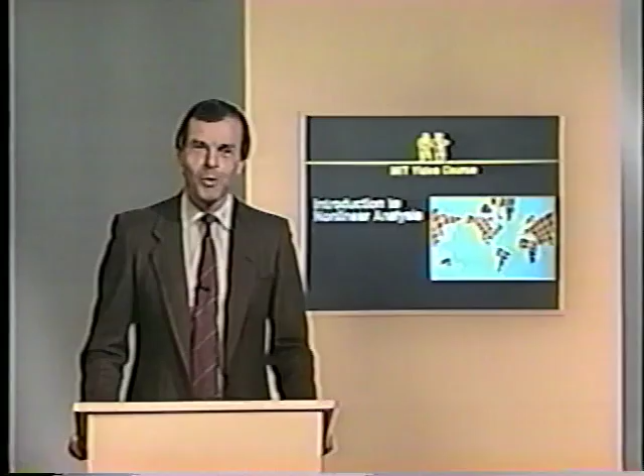Let me now share with you briefly some thoughts that I had while designing this course. The field of nonlinear finite element analysis is a very large field, and in fact 4 large fields come to mind as feeding into nonlinear finite element methods: continuum mechanics, finite element discretizations, numerical algorithms, software considerations. Because the field of nonlinear finite element analysis is such a large field, I had to select certain topics as the topics of this finite series of lectures.

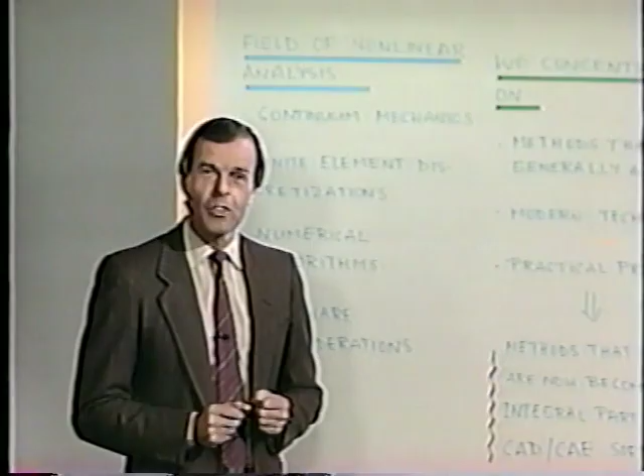I believe that the lectures provide a good introduction and foundation to nonlinear finite element analysis. Of course, the lectures cannot answer all the questions that you might have regarding nonlinear finite element analysis. I believe, though, that they will be answering some of the questions and hopefully stimulate discussions that you might have while watching these lectures with your colleagues.

We at MIT continue to work in nonlinear finite element analysis, and we also offer from time to time short courses. It would be very nice to meet you at one of these short courses and to discuss any questions that you might have regarding these lectures once you have seen them, and regarding your work on nonlinear finite element analysis in general. Let me now return to what I like to talk about in this course.

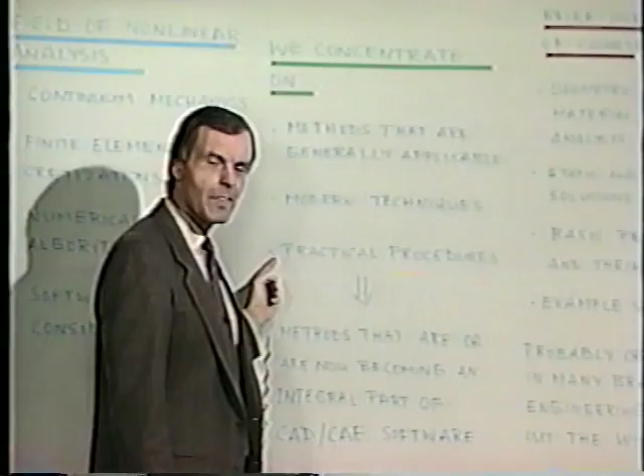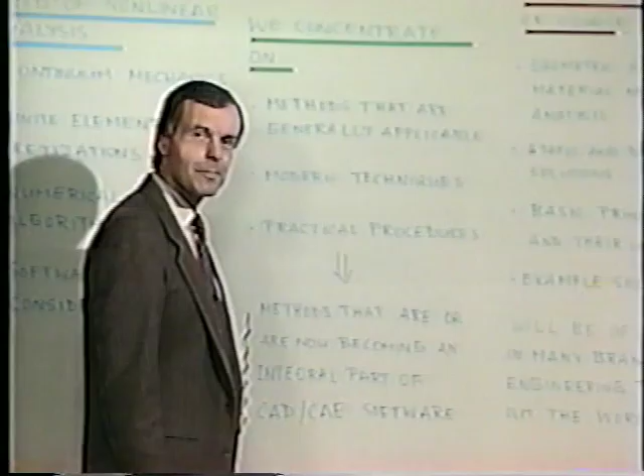In this course, we want to concentrate on methods that are generally applicable, modern techniques, and practical procedures. I believe it is important that we discuss in this course practical and effective procedures, in particular methods that are or are now becoming an integral part of computer-aided design, computer-aided engineering software. In this course, I would like to discuss with you geometric and material nonlinear analysis, static and dynamic solutions, basic principles and their use, and share with you example solutions.

I believe that the course will be of interest in many branches of engineering throughout the world, and in this spirit we have designed a logo for this course. The logo is shown here. It shows the whole world as an assemblage of finite elements. If you're watching me from Chicago, you're watching me from about here. If you're watching from Munich, you're watching about there. And if you are in Tokyo, you're watching me from about there.

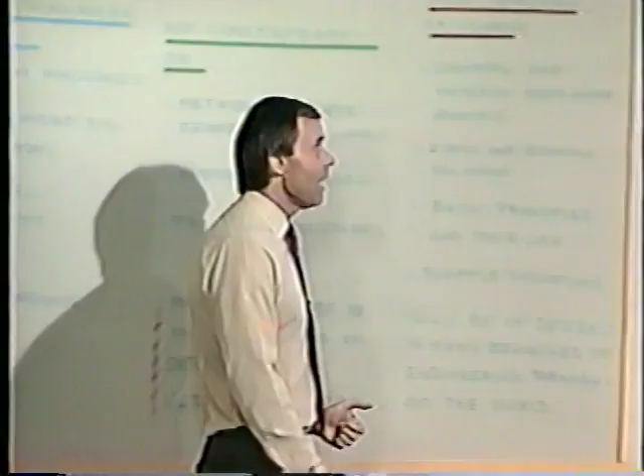Welcome to this course. I'd like to now start with the first lecture, which has the title Introduction to Nonlinear Analysis. And let me take off my jacket because we have a lot of work ahead, and summarize to you what I would like to present to you in this first lecture.

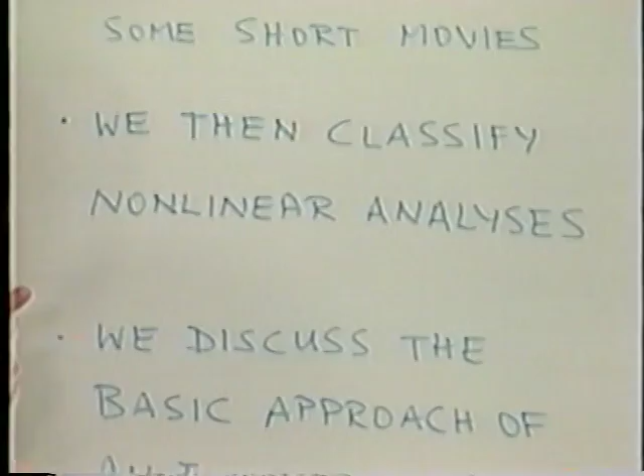We discuss first some introductory view graphs and show some short movies. We then will classify nonlinear analyses. We then discuss the basic approach of an incremental solution, and we share some example solutions. Let me walk over to my view graphs, which I've prepared for this lecture, so that we can start with the discussion of this material.

Finite element nonlinear analysis in engineering mechanics can be an art, but it can also be a frustration. For those of you who have been doing some nonlinear analysis already, I think you will value that it can be an art and it can be a frustration, because it can be a very difficult matter, but it always provides a great challenge. And that, of course, is the exciting part of working in nonlinear finite element analysis.

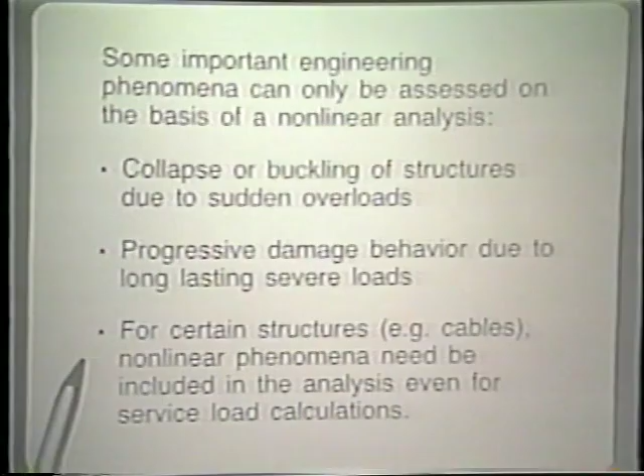Some important engineering phenomena can only be assessed using nonlinear analysis techniques. For example, the collapse or buckling of structures, due to sudden overloads. I'm thinking here typically of shell structures, say. The progressive damage behavior due to long-lasting severe loads, such as, for example, high-temperature loads in nuclear reactor components. And for certain structures, such as cables and transmission towers, nonlinear phenomena need be included in the analysis even for service load calculations.

The need for nonlinear analysis has certainly increased in recent years due to the need for the use of optimized structures, the use of new materials that are being introduced or have been introduced over recent years, and the addressing of safety-related issues of structures. There's more rigorous attention being given to such safety-related issues now, and certainly the corresponding benefits can be most important.

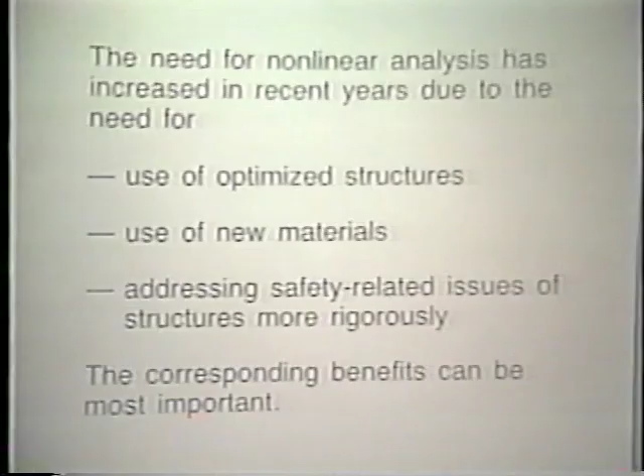Problems that are addressed by nonlinear finite element analysis can be found in many branches of engineering. I've listed here some such branches: nuclear engineering, earthquake engineering, the automobile industries, defense industries, aeronautical engineering, mining industries, offshore engineering, and so on.

I'd like to now show you some movies that we have assembled regarding some finite element analyses in certain fields. Let us start with a movie related to the defense industries, then go on to a movie related to some work in the automobile industries, then look at a movie related to some work in earthquake engineering, and finally an interesting movie regarding a structural engineering problem.

So let me now introduce you to the first movie, which is a movie in which a tank is modeled using a geometric modeler first and then setting up a finite element mesh.

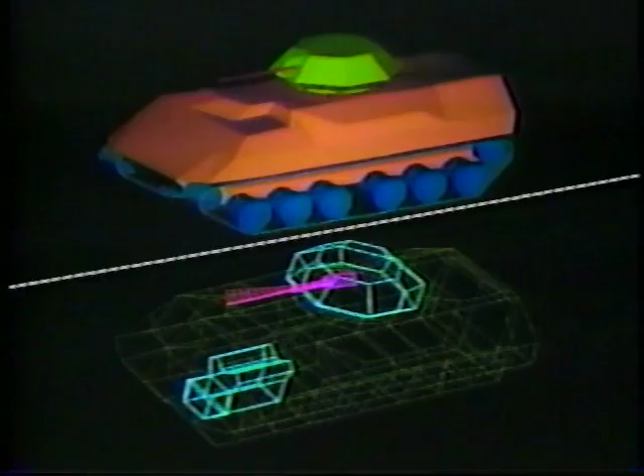Here we see a tank in a maneuver. You surely have seen such structure before. Here you see in the top part of the picture the geometric model of a tank, and in the bottom part of the picture a finite element discretization. The top model was generated using a geometric modeler, and the bottom model was obtained using a finite element mesh generator. These models were constructed by Structural Dynamics Research Corporation.

The second movie relates to a problem that has obtained much attention in the automobile industry, namely what happens when a motor car crashes against another motor car. Tests have been performed of motor cars crashing against rigid walls. Test results have been assembled, and finite element methods may well be used in the analysis of such types of problems.

Here we see a test performed by the Ford Motor Car Company of a car crashing against a rigid wall, and here a close-up of what happens to the passengers not wearing seat belts. And another such test. Here now in more detail what happens to the front part of the car.

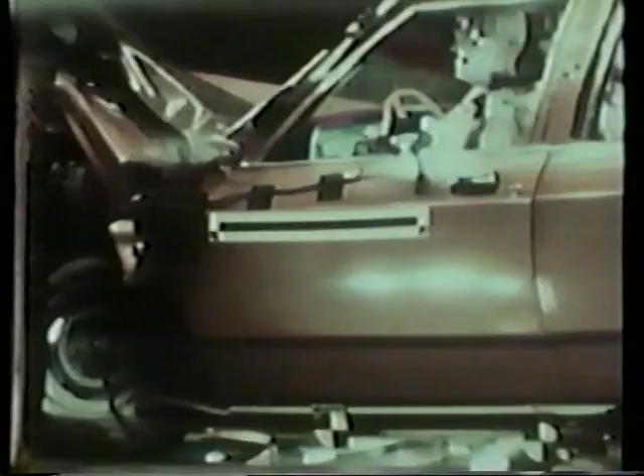There has since some time been much interest in modeling these phenomena on the computer, and finite element methods can be applied and are very valuable here.

The third movie relates to the use of finite element methods in earthquake engineering. Here we look at the finite element model of a tank and the dynamic motions of that model. We are surely all aware that earthquake motions can cause severe structural vibrations and possibly collapse of structures.

Here we see a transformer and the tank to be modeled on it, and here a close-up view of the tank. The finite element model of the tank was constructed by ASEA, a Swedish company, and here we see some vibratory motions of the model.

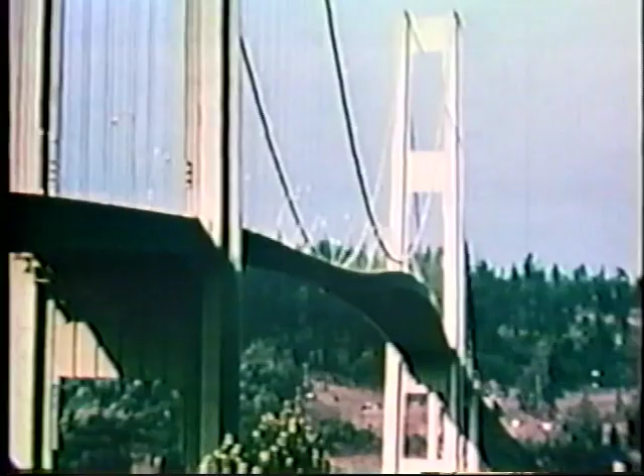The fourth movie shows the dynamic response and collapse of the Tacoma Narrows Bridge in 1940. The Tacoma Narrows Bridge collapsed on November 7, 1940, about four months after its opening, in winds of 40 to 45 miles per hour.

Here you see the dynamic motions of the bridge prior to its collapse, a side view, and now a view along its center line. Notice the high torsional vibrations of the bridge. The bridge went through large dynamic motions for hours until its collapse. We only show a very small segment of that time. And here you see how the bridge collapsed.

Of course, these movies only indicate to some extent where finite element methods might be applied in engineering practice, but I thought you might enjoy seeing the movies. Let me now continue with the material that I have documented on the view graphs.

For an effective nonlinear analysis, a good physical and theoretical understanding is most important. You want to have some good physical insight in the problem, set up a mathematical formulation, a finite element model, solve that model, and that will enrich your physical insight. It is this interaction and mutual enrichment between the physical insight and mathematical formulation that can be most valuable.

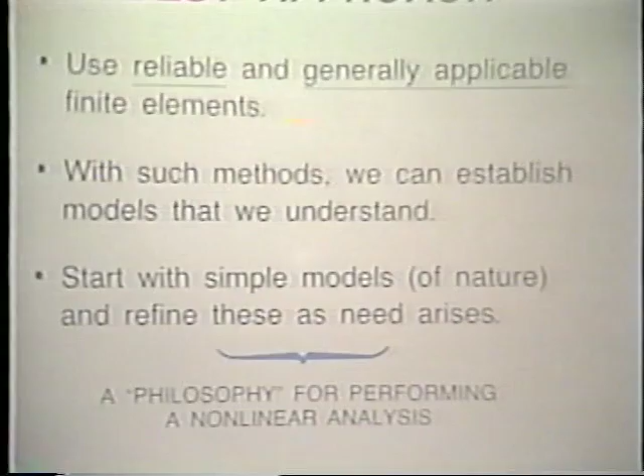The best approach for a nonlinear finite element analysis is to use reliable and generally applicable finite elements. With such methods, we can establish models that we can understand, that we have confidence in. We start with simple models of nature and refine these as need arises. In fact, I like to think of an engineer as developing a first model on the back of an envelope, using simple equations, and these equations will give some insight into the structural response.

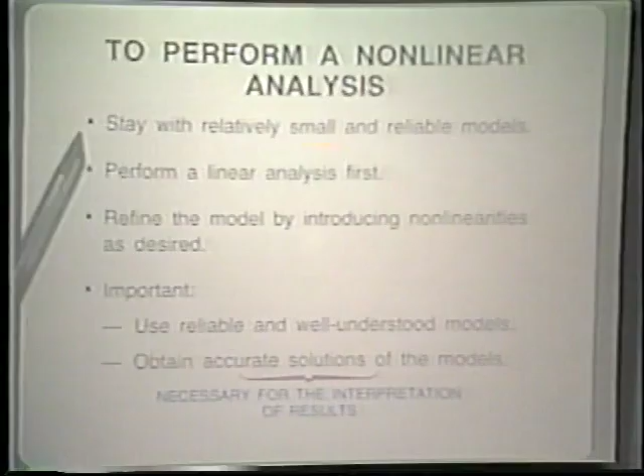If necessary, a first finite element model is set up, and this finite element model is then refined as need arises. To perform a nonlinear analysis, we want to stay with simple, relatively small and reliable models.

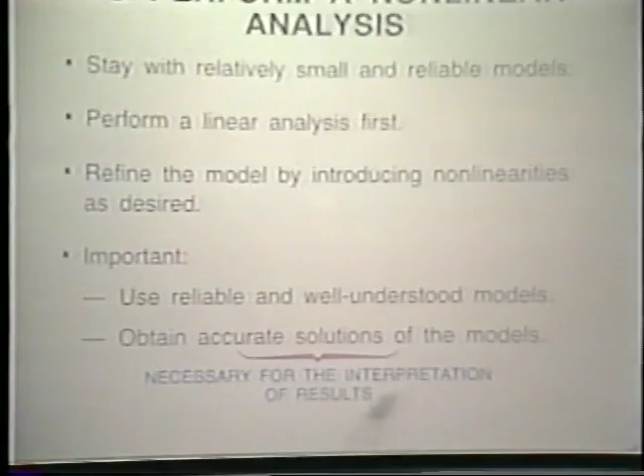We always want to perform a linear analysis first. I will show examples in this course related to this. It is very important in my view to first do a linear analysis and then only go on to a nonlinear analysis. We want to refine the model by introducing nonlinearities as desired, using reliable and well understood models, and obtain accurate solutions. This is very important for proper interpretation of the results.

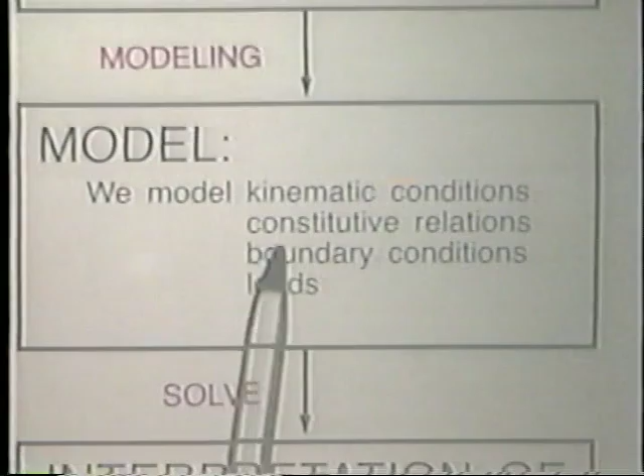Here we show schematically the finite element modeling process. We have a problem in nature. We model that problem, the kinematic conditions, the constitutive relations, the boundary conditions, the loads, and so on, using finite elements. We solve the model and interpret the results. This model can only approximate the actual problem in nature, and on interpretation of the results, we may find that we should refine our model. We set up a new model, solve again, and we may cycle a number of times through this process.

Traditionally, test results have been sought for very complex problems. Laboratory test results have been sought, and this may still be necessary now. However, the finite element modeling process will certainly complement these laboratory test results.

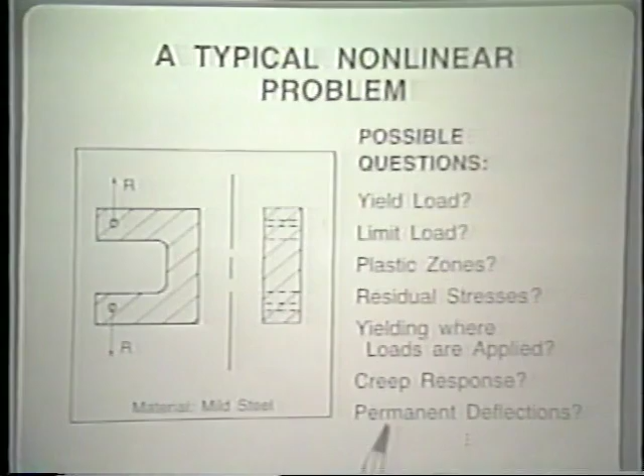What are the plastic zones? What are the residual stresses when the load is removed? Is there yielding where the loads are applied, right around here? What is the creep response of the bracket when subjected to high temperature conditions and these loads? And what are the permanent deflections of the bracket, etc.

There are many more questions that could be asked, and certainly these questions can only be answered by a nonlinear analysis. Possible analyses that we might consider are the following.

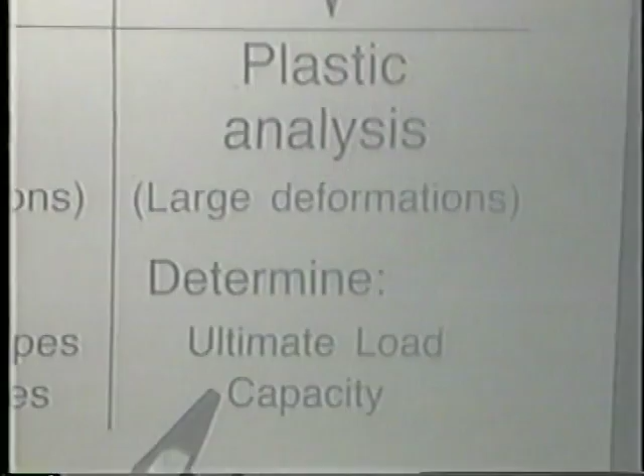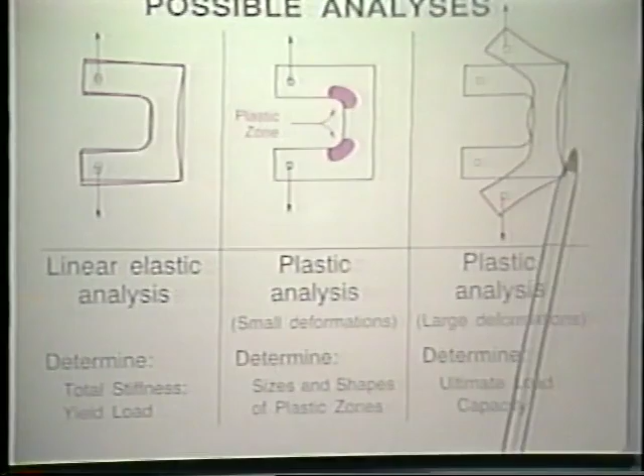Then we might want to go on to a large deformation plastic analysis. This analysis would determine the ultimate load capacity of the bracket, and notice the displacements are now large. They are actually large. Here we had small displacement assumptions; here we have included the large deformation effects, as also shown on the view graph.

For analysis, it is very good to actually classify all the types of analysis that one might want to perform. The first category of nonlinear analysis is what we call materially-nonlinear-only analysis, MNO analysis. In this analysis, we assume that the displacements are infinitesimal, the strains are infinitesimal — both of these quantities are very, very small — and the stress-strain relationship is nonlinear. So all nonlinearities lie really in the stress-strain relationship.

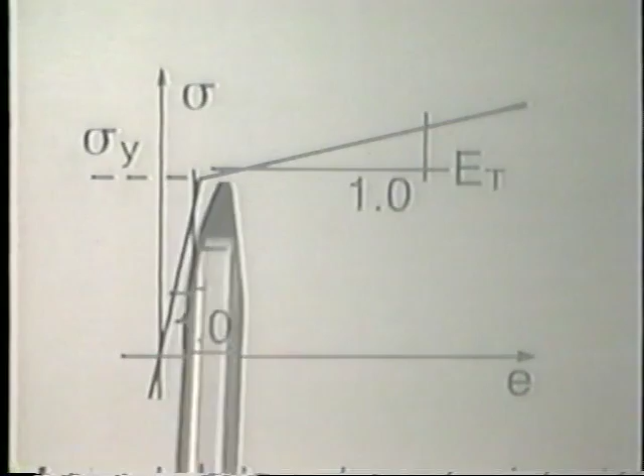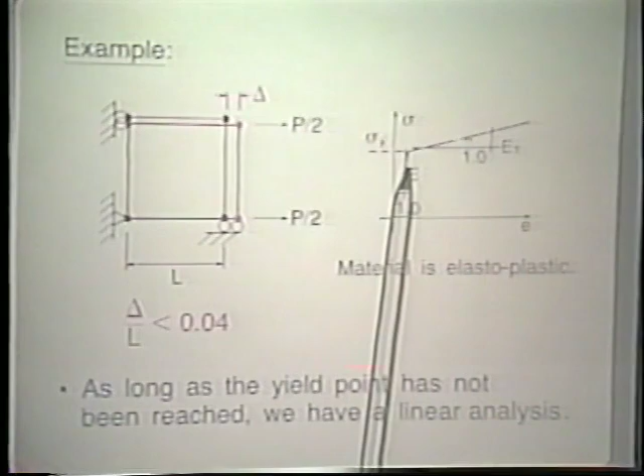As long as the stresses do not exceed sigma y, we really have a linear analysis. So if you use a computer program with an MNO formulation and you subject your model to forces such that the stresses are below sigma yield everywhere in the model, then you should really obtain the linear analysis results.

The next category of problems is large displacements and large rotations, but small strains. Here we still keep the assumption of small strain, but we allow large displacements and large rotations. The stress-strain relations can be linear or nonlinear.

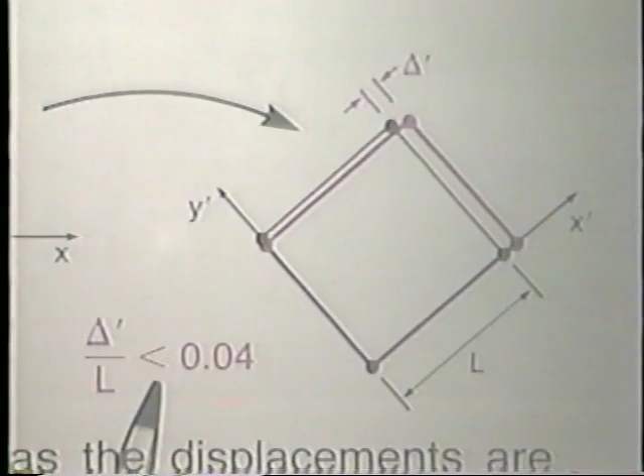Schematically, here is our 4-node element again. This element would move as shown, going through large displacements and large rotations, but the strains in the element, expressed by delta prime over L, are still small. You may want to make this 0.02. As long as the displacements are small, we have really an MNO analysis.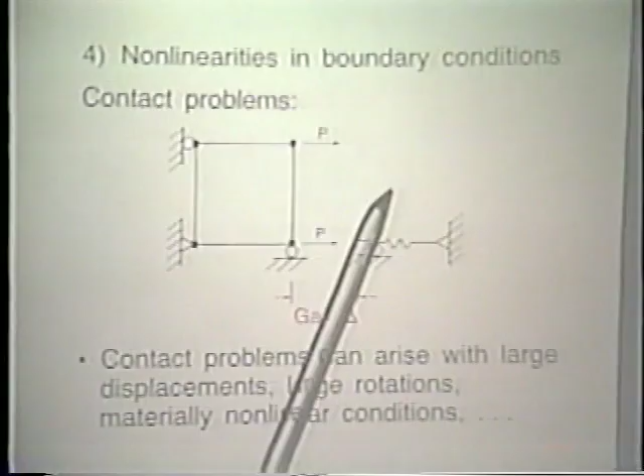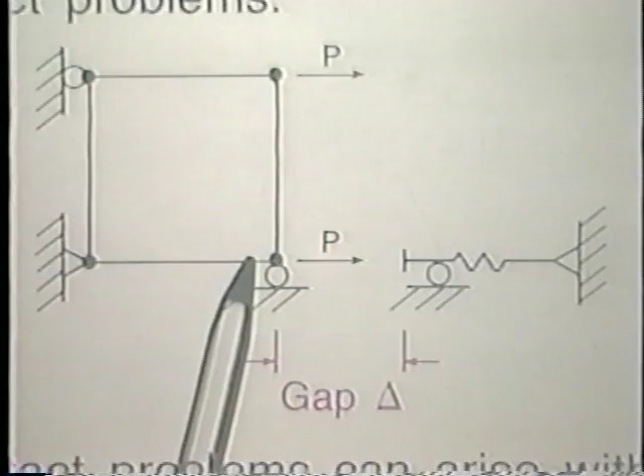The 4-node element, once again, is subjected to loads. There's a gap here between this element and the spring, and as soon as this gap is closed, the spring provides stiffness into the system, being now connected to the 4-node element. That stiffness has to be taken into account in the analysis, and there are procedures to solve contact problems. This is, of course, a very simple contact problem, but there are procedures to solve contact problems.

Contact problems are very difficult to handle, particularly if you're dealing with frictional effects. We will, in this set of lectures, not really address contact problems, except that in the last lecture we actually look at one particular contact problem, using a computer program for its analysis.

Let's turn to an example analysis, and I'd like to consider with you briefly the analysis of a bracket. Here is a bracket of the kind we looked at earlier. Notice the dimensions are as shown. The thickness of the bracket is 1 inch, and this bracket is going to be loaded to large loads.

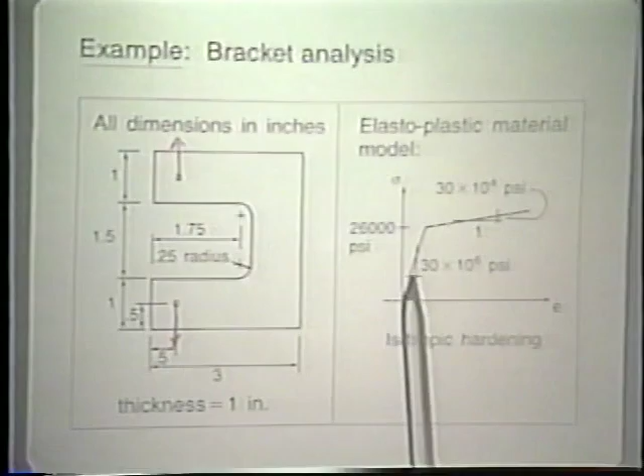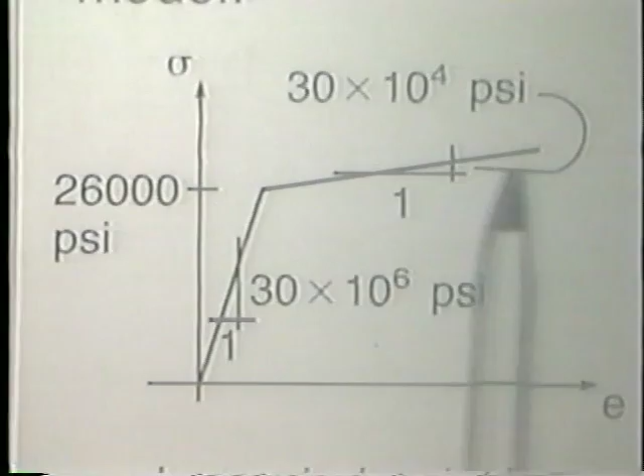We make a material assumption, namely an elasto-plastic material with isotropic hardening as shown here. The yield stress is 26,000 psi. Here you have the Young's modulus, and here you have the strain hardening modulus.

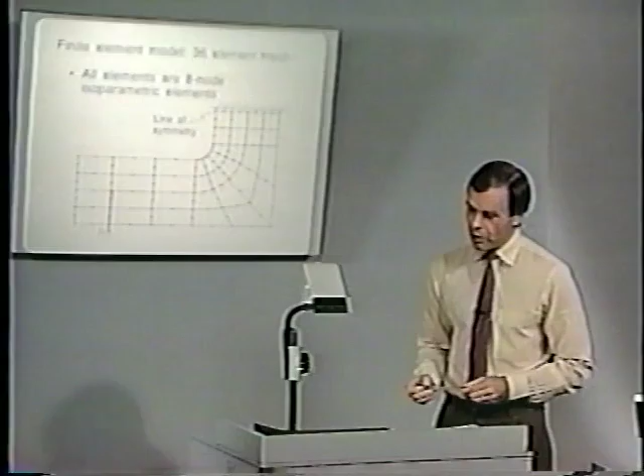We use symmetry conditions to analyze the bracket the same way we would in a linear analysis. With these symmetry conditions, we consider on this view graph just the lower part of the bracket. You see a pin here, rollers there, and we are using 8-node isoparametric elements to model this part of the bracket.

We apply the load as shown here. Notice no special considerations are given to the hole where the load is applied. Our interest really lies in predicting the stresses and strains in this region and also predicting the overall collapse of the bracket.

We will use 3 kinematic formulations for the analysis. First, we use a materially-nonlinear-only analysis assumption. In other words, small displacements, small rotations, and small strains are assumed in the analysis of this bracket.

Then we will perform an analysis using the total Lagrangian formulation. We will discuss this formulation quite extensively in later lectures of the course. This formulation assumes large displacements, large rotations, and large strains kinematically. Kinematically, these are the assumptions.

However, we will point out that the material law description that we are using is only applicable with this formulation to small strains. So the overall analysis using this total Lagrangian formulation is then only applicable to model large displacements, large rotations, but only small strains. I'll get back to that just now.

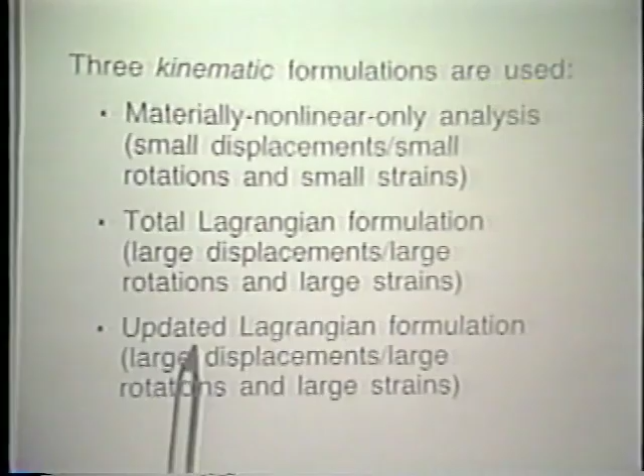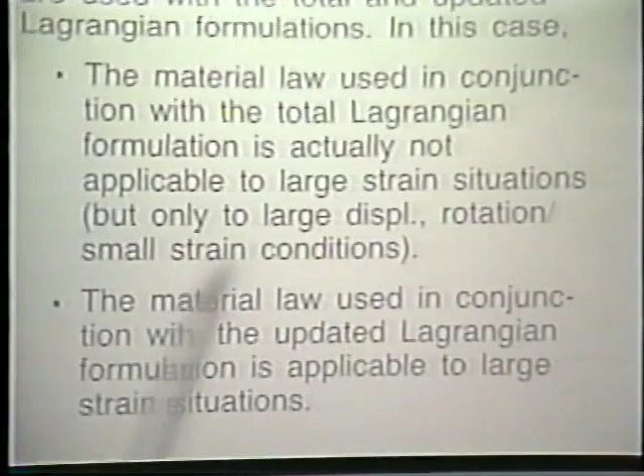We will also use an updated Lagrangian formulation which kinematically includes large displacements, large rotations, and large strains. On the material model level, we also include there large strain effects. So once again, as summarized here, the material law used in conjunction with the total Lagrangian formulation is not applicable to large strain situations, but only to large displacements, rotation, and small strain conditions. Our total Lagrangian analysis is only applicable to this kind of situation, whereas the updated Lagrangian formulation does model kinematically and on the stress-strain level large displacements, large rotations, and large strains.

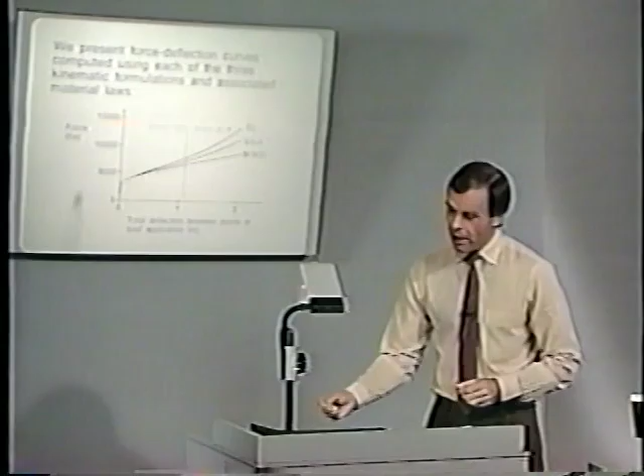The analysis results obtained are shown here. Notice we are plotting the force applied and the total deflection between points of load application.

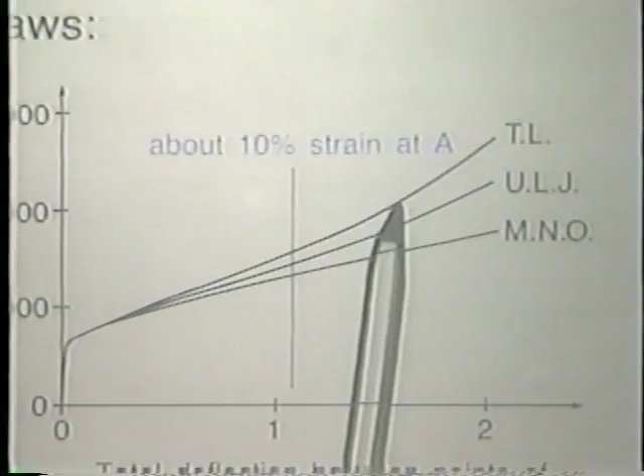The three analyses give us three distinct curves at large displacements, but for small displacements these curves are indistinguishable. Notice here we have about 10% strain at point A, which I will show you just now. The important point is that these are three distinct curves, because we made different assumptions kinematically and on the stress-strain law level. We will discuss such assumptions in later lectures of this course.

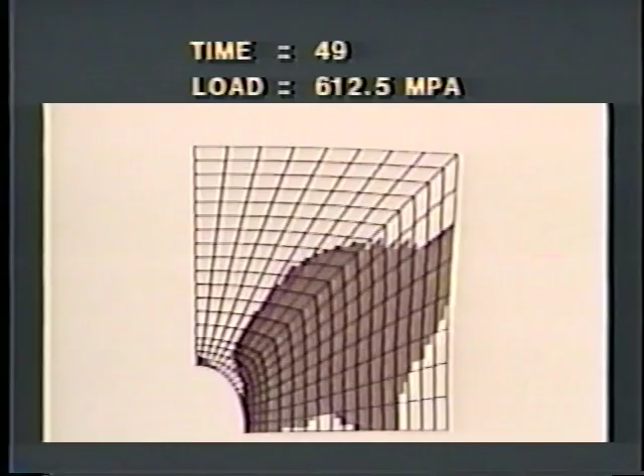Here now you see the time and load increasing. In the first load steps, the plate remains elastic and the deformations are small. Now you see the first plasticity developing near the hole. The plastic zone increases rapidly as higher load levels are reached, until a large portion of the plate is plastic and, in essence, the maximum load carrying capacity has been reached. We will consider this analysis in more detail later in the course.

The second animation shows a frame that is subjected to forces such that it undergoes very large displacements. Here we see the frame modeled using beam elements, which we discuss later in the course. The frame is loaded as shown by the force arrows, with pin connections at the points of load application.

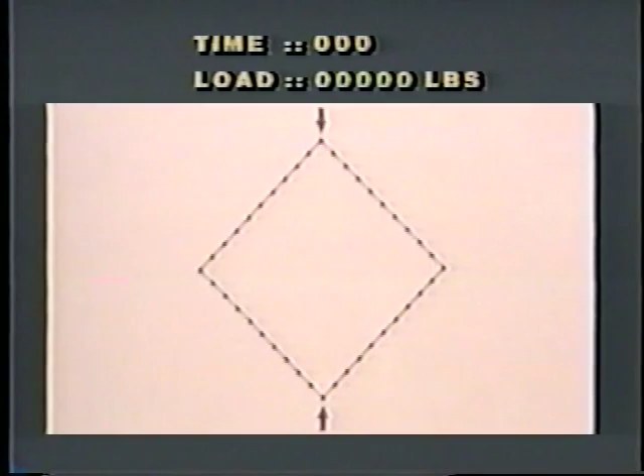The frame is assumed to be of an elastic material, hence no plasticity is assumed to develop, although the frame will be subjected to very large displacements. The indicated loads will push the top of the frame down and the bottom up, to such an extent that the points of load application cross over.

You see above the frame a time and a corresponding load level. This is again a static analysis, and each time increment of 1 corresponds merely to a load increment of 250 pounds. Here now you see the deformations of the frame develop as the load is increased.

The displacements are very large at the higher load levels. Of course, this is only a numerical experiment at the high load levels, but an interesting one that indicates in a simple manner what can be done in finite element analysis. We will consider this problem solution also in more detail later in the course.

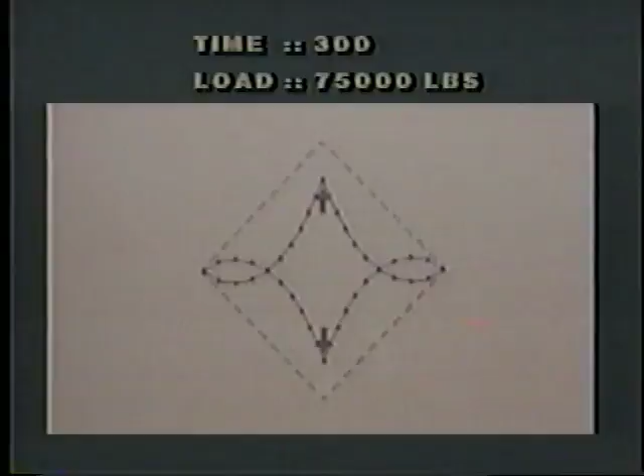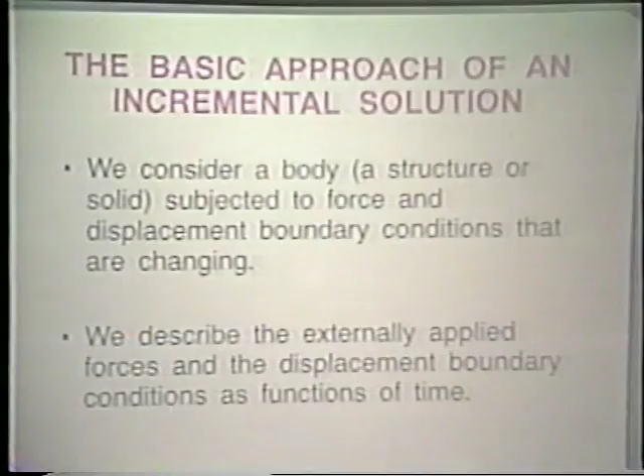Let us now look at the basic approach of an incremental solution. We consider a body, a structure or solid, subjected to force and displacement boundary conditions that are changing, and we describe the externally applied forces and the displacement boundary conditions as a function of time.

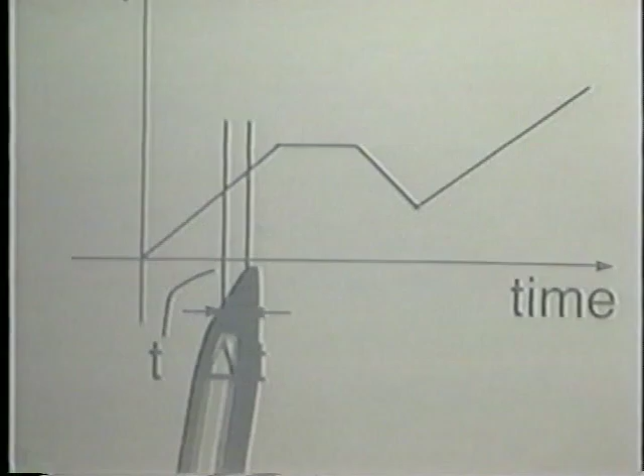Schematically, here we show a body supported as shown and subjected to a force varying as a function of time, and a prescribed displacement also varying as a function of time. The time variation of the force is shown here, and the time variation of the prescribed displacement is shown here. Notice we have a particular time point t, and here t plus delta t, similarly for the displacement. Since we anticipate nonlinearities, we use an incremental approach measured in load steps or time steps.

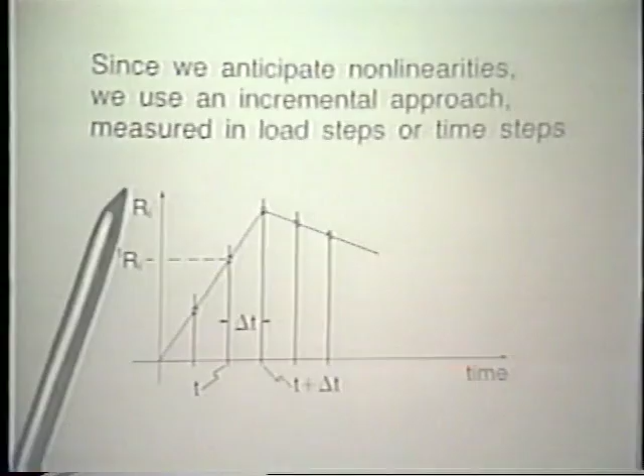This means that the prescribed loads, the imposed loads, and the prescribed displacements are discretized as a function of time as shown on this view graph. Notice here we have at time t the imposed load tRi, where this upper superscript t means at time t. Then delta t in advance, at time t plus delta t, we would have t plus delta t Ri. In other words, this t would now be replaced by t plus delta t, and so on. This is how we are inputting or prescribing the imposed loads and also the prescribed displacements.

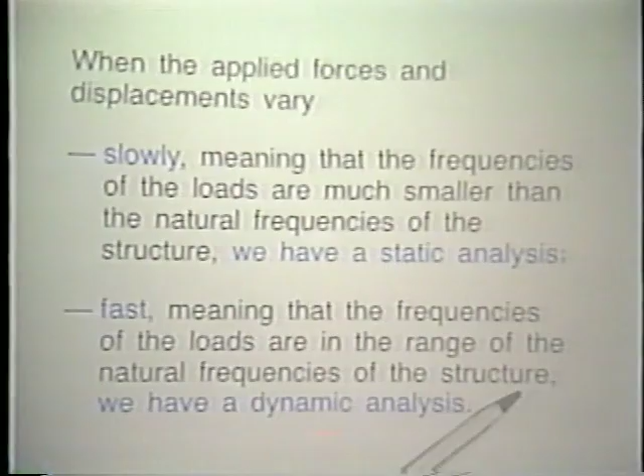When the applied forces and displacements vary slowly, meaning that the frequencies of the loads are much smaller than the natural frequencies of the structure, we have a static analysis. This means that the periods of the loads are very long when measured against the natural periods of the structure. For example, you have a spring and you apply a load that varies very slowly, and this means we have a static analysis. If the loads vary fast, meaning that the frequencies of the loads are in the range of the natural frequency of the structure, then we have a dynamic analysis.

Let us look a bit closer at the meaning of the time variable. Time is a pseudo-variable only denoting the load level in nonlinear static analysis with time-independent material properties.

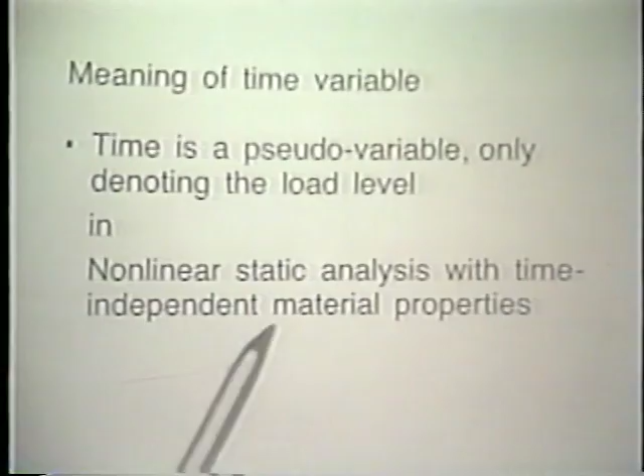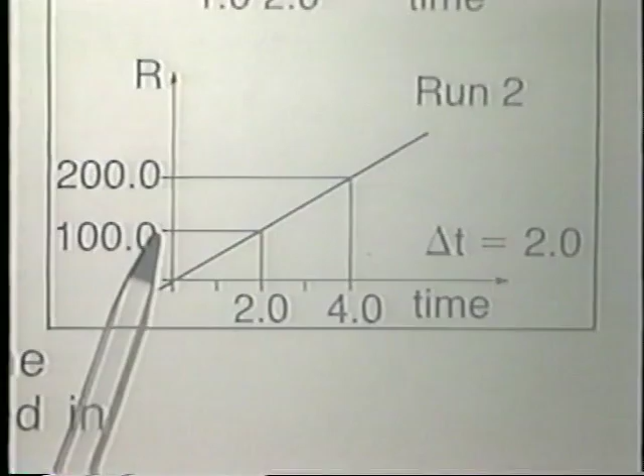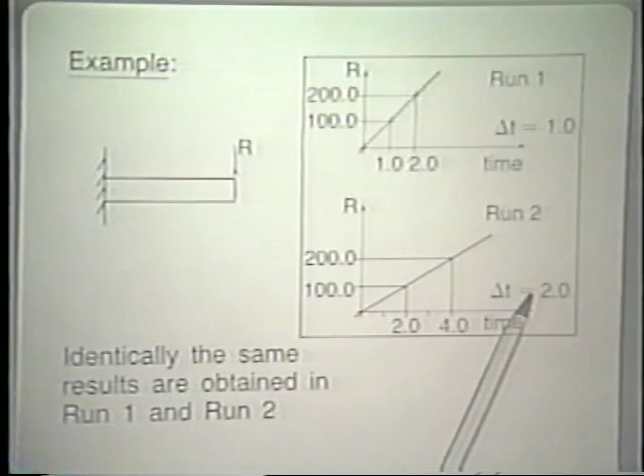As an example, here we have a cantilever subjected to a tip load R. If we were to perform run 1, in which we prescribe the loads as shown here, notice at time 1 a load of 100, at time 2 a load of 200, delta t equals 1. If we were to perform this analysis, and in addition an analysis where delta t equals 2 and the load at time 2 is 100, the load at time 4 is 200, then we would obtain identically the same results in run 1 and run 2, because it's a static analysis and the material properties are time independent. So in this particular case, time is certainly a pseudo variable, and we can design many different time stepping schemes using different time steps and always obtain the same results, provided at the end of the first time step we have the load 100 and at the end of the second time step we have the load 200.

However, time is an actual variable in dynamic analysis and in nonlinear static analysis with time-dependent material properties, for example when the material contains creep conditions.

Now delta t must be chosen very carefully with respect to the physics of the problem, with respect to the numerical techniques used, and the costs involved. If delta t is not chosen appropriately, you may have a very high cost for the analysis, and on the other hand, with an improper choice of delta t, you may also obtain very bad results. So it is very important to choose delta t judiciously for an accurate and cost-effective analysis.

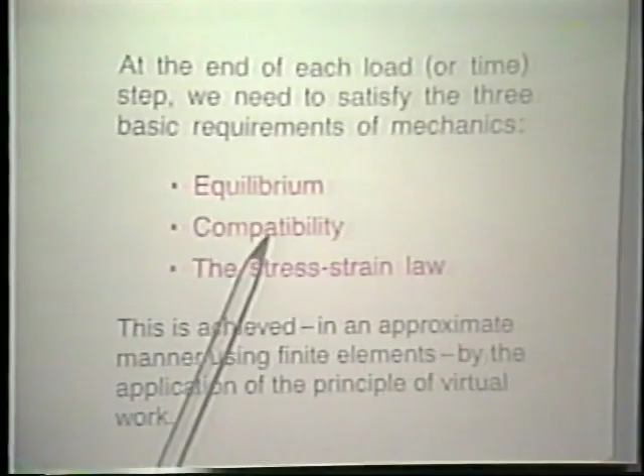At the end of each load or time step, we need to satisfy the three basic requirements of mechanics: equilibrium, compatibility, and the stress-strain law. These are the three fundamental requirements to be satisfied in mechanics.

This is achieved in finite element analysis in an approximate manner using finite elements by the application of the principle of virtual work. Now, there is a lot of information on this view graph, and we don't have time in this lecture to go into any depth. There is quite a bit of mathematics that has to be introduced for the discussion of all of what we see here, and that's what we do in the later lectures. I do not have time now to go into this mathematics, but let us just very briefly look at the basic procedure that we are using.

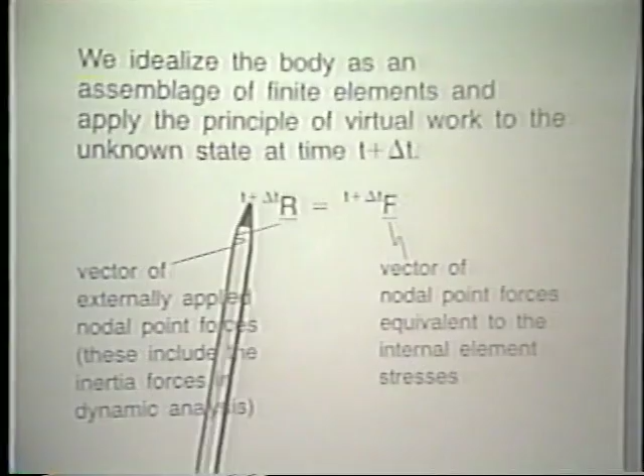We are saying that at any time step t plus delta t, the externally applied loads, the vector of externally applied loads, which includes pressure loads, concentrated loads, and in dynamic analysis also inertia forces, must equal the vector f at time t plus delta t, where this vector f corresponds to the internal element stresses at time t plus delta t. We will talk in later lectures about how we calculate this vector t plus delta t f. Of course, there are some very important considerations in the proper calculation of this vector f.

Let us now assume that the solution at time t is known, hence the stresses at time t are known, the volume, surface area, and so on.

All the information corresponding to the body at time t is known, and we now want to obtain the solution corresponding to time t plus delta t, that is for the loads applied at time t plus delta t. Of course, this is a typical step of the incremental solution. Once we have the solution for time t plus delta t, we can use the same scheme to calculate the solution for time t plus 2 delta t, and so on.

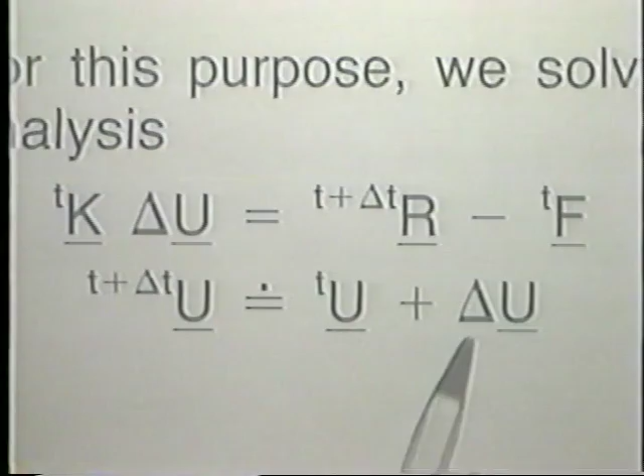Notice I have an approximation sign there. This approximation sign is the result of the fact that we obtained this set of equations by linearization. We will talk about these equations, how these equations are obtained, in later lectures.

We will start from the basic principle of virtual work and use continuum mechanics considerations to derive in a very consistent manner this set of equations. Of course, there are many details involved. We will talk about the total Lagrangian formulation, the updated Lagrangian formulation, the materially-nonlinear-only analysis, the details that go into these formulations in terms of kinematic approximations related to large displacements, large rotations, large strains. We also will talk about the constitutive relations that enter in this tangent stiffness matrix and in this force vector, and so on.

Anyway, this set of equations gives us an approximation to the displacements at time t plus delta t because of the linearization process used to arrive at these equations.

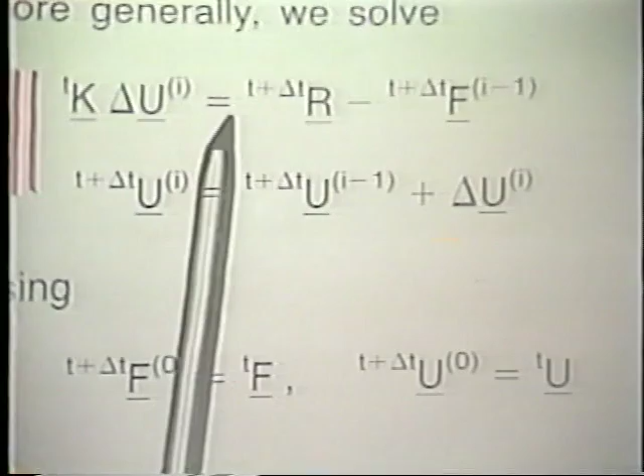And more generally, we want to solve this set of equations: tangent stiffness matrix, still on the left-hand side, times a displacement increment corresponding to iteration I. On the right-hand side, we have the load vector corresponding to the loads at time t plus delta t, and the nodal point force vector corresponding to the internal element stresses at time t plus delta t at the end of iteration I minus 1.

This is here the out-of-balance load vector corresponding to the start of iteration I. This out-of-balance load vector, with that tangent stiffness matrix, gives us an increment in the nodal point displacement vector corresponding to iteration I. We take this one, add it to the previous displacements that we had already, namely those corresponding to time t plus delta t at the end of iteration I minus 1, and we obtain a better approximation to the displacements at time t plus delta t.

Notice in this iteration we have initial conditions given down here. In iteration I equal to 1, on the right-hand side we need this vector, and that vector is given by tF, the nodal point force vector corresponding to the internal element stresses at time t. We also need initial conditions on the displacement vector, and those are given right here.

Notice that when I is equal to 1, this set of equations reduces to the equations that we had on the previous view graph. Once again, we will derive these equations from basic continuum mechanics principles in later lectures, and we will also talk about iterative schemes to accelerate convergence in the solution of these equations.

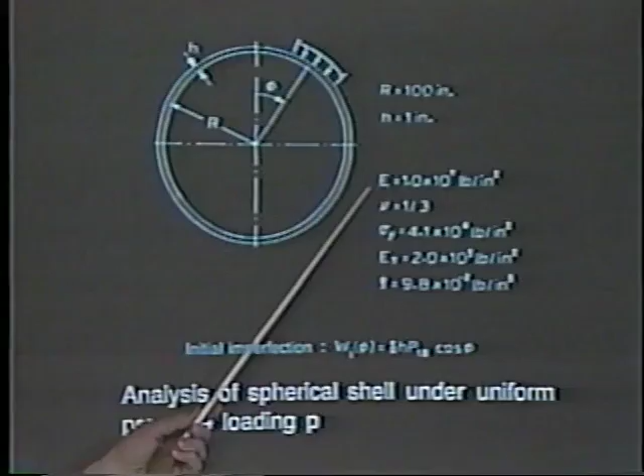Here we show the structure that we want to consider. It's a spherical shell subjected to pressure loading. The material data regarding the shell are given here. Notice we also include the mass density because we will be talking about dynamic analysis of this shell as well. We will also introduce an imperfection of the shell, given down here, as a function of the angle phi, which you see up here as well.

The thickness h of the shell, the Legendre polynomial given here, and a parameter delta that we will be varying. First we will consider a static analysis of the shell and then the dynamic analysis of the shell.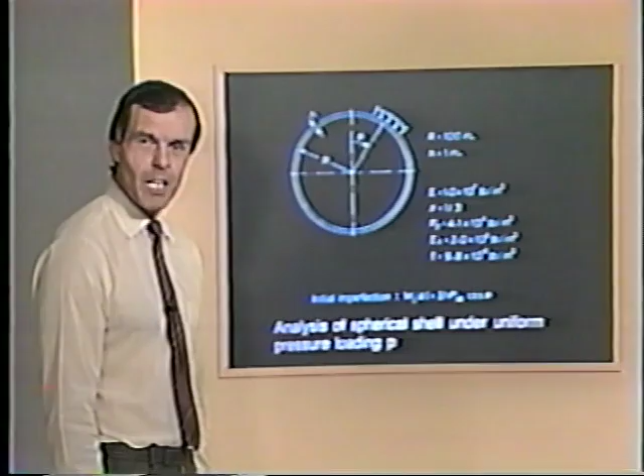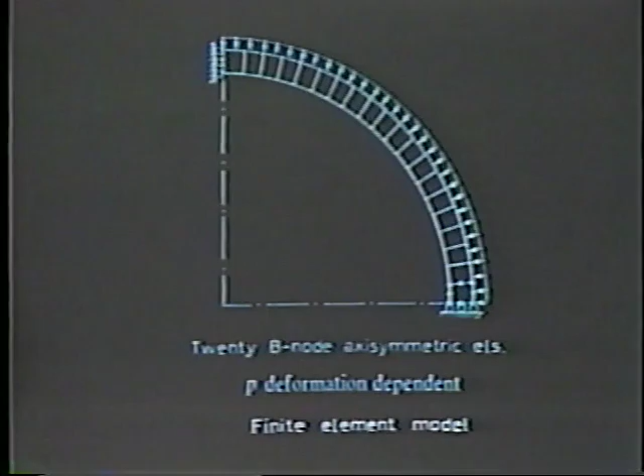On the next slide you see the model used for the analysis of the shell: twenty 8-node elements, axisymmetric elements, subjected to pressure loading, which we are modeling as deformation dependent loading. That means that as the shell deforms, the pressure will remain perpendicular to the shell surface to which it is applied. On the next slide we show the first analysis results.

On this axis we plot P over PCR, where PCR is the buckling pressure of the shell assuming elastic conditions and calculated using an analytical solution. On this axis we plot the radial displacement of the shell at phi equal to 0. The dotted line shows the linear elastic solution to the shell problem. Notice that these dots, of course, could be continued here.

The total Lagrangian formulation, which includes large displacement and large rotation effects, gives us a buckling pressure of 0.98 PCR. A materially-nonlinear-only analysis, including elasto-plastic material conditions but not large displacement, large rotation effects, gives us this solution here. Notice that this MNO analysis does not give us a proper buckling prediction for the shell.

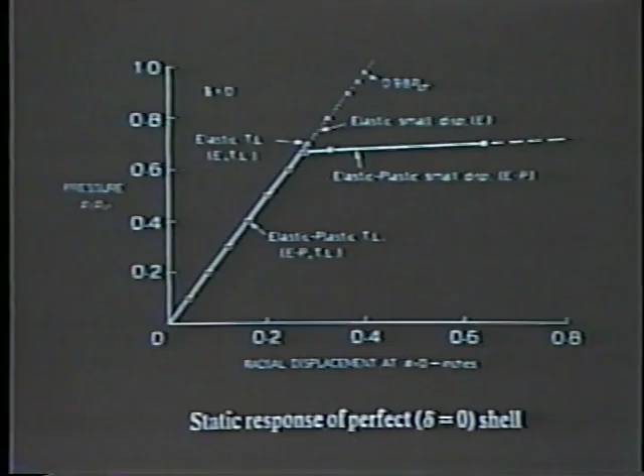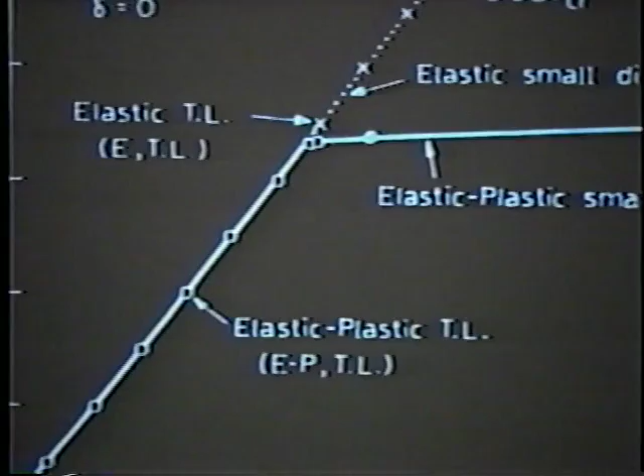To obtain the elastic plastic buckling load of the shell, we have to perform a total Lagrangian formulation solution, and we obtain this load level here as the buckling pressure. This analysis was performed with no imperfections on the shell.

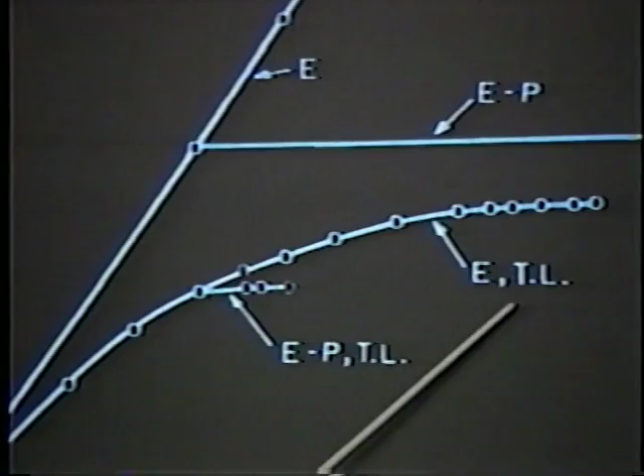The next slide shows the results of the same kind of analyses, but with an imperfection of delta 0.1. Notice here the linear analysis, denoted E; the materially-nonlinear-only analysis results, denoted EP; the large displacement, large rotation analysis results assuming elastic conditions, denoted E, TL, TL standing for total Lagrangian formulation; and the elasto-plastic large displacement solution, denoted EP, TL.

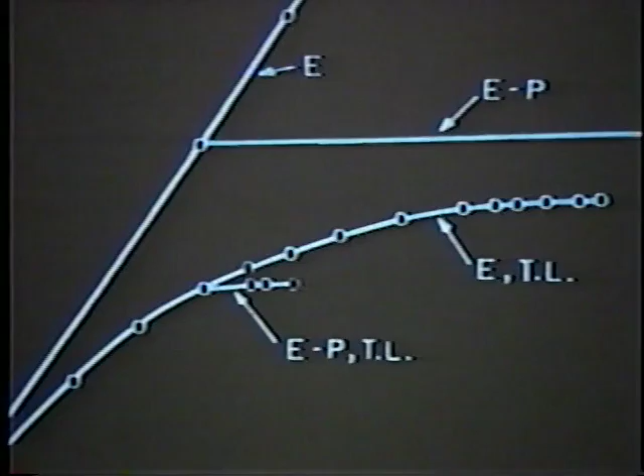Notice that because of the imperfection, the maximum load carrying capacity of the shell is decreased.

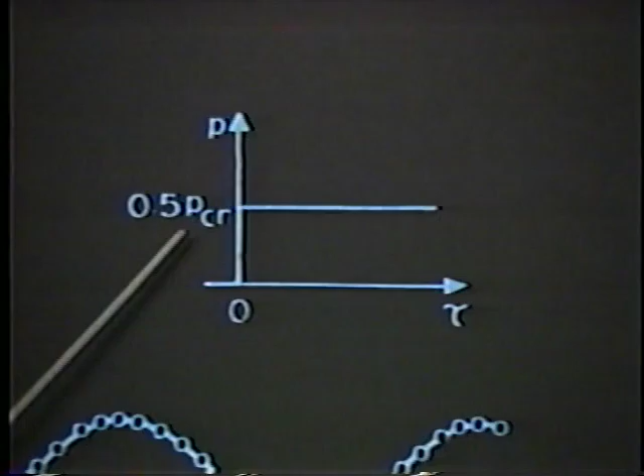The next slide shows the results obtained using a dynamic analysis. This time we apply the pressure instantaneously as a step load, constant in time. Notice we are plotting here a mean displacement delta of the shell and time along this axis.

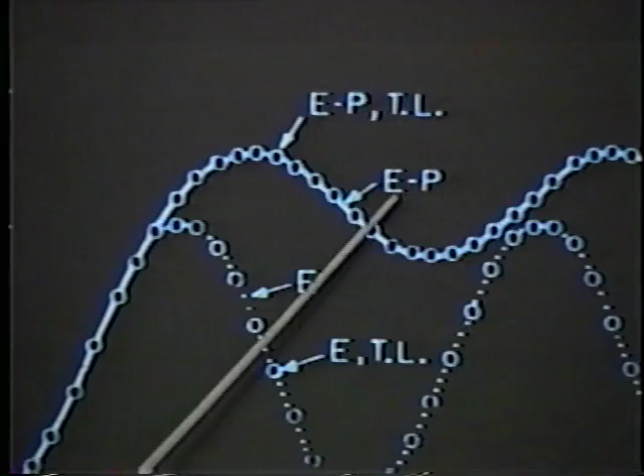The ETL solution results are very close to the E solution results. I think you know now what I mean by E and ETL. The EPTL solution results are quite close to the EP solution results. This means that the shell is stable under this load application - there is no buckling, no increase in deformations as time progresses.

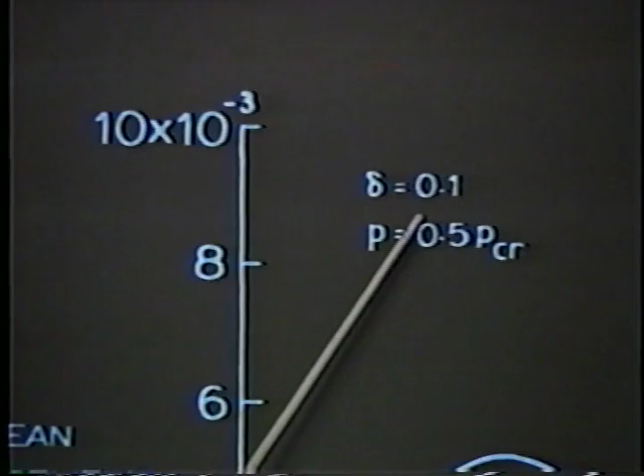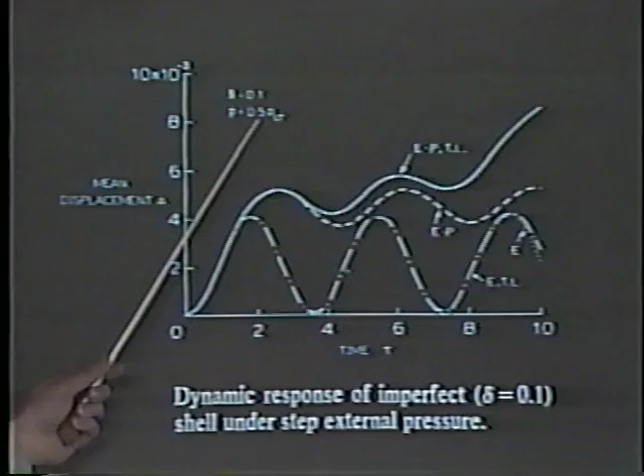The next slide shows that as we increase the imperfection level from delta equal to 0 to delta equal to 0.1, the displacements of the shell using the EPTL solution or formulation increase with time. Therefore, the shell is unstable under this pressure application - of course, dynamic pressure application now.

Notice the other solution results are given here. Therefore, we now can play with the imperfection level and the load level in order to estimate the load carrying capacity of the shell for each of these cases.

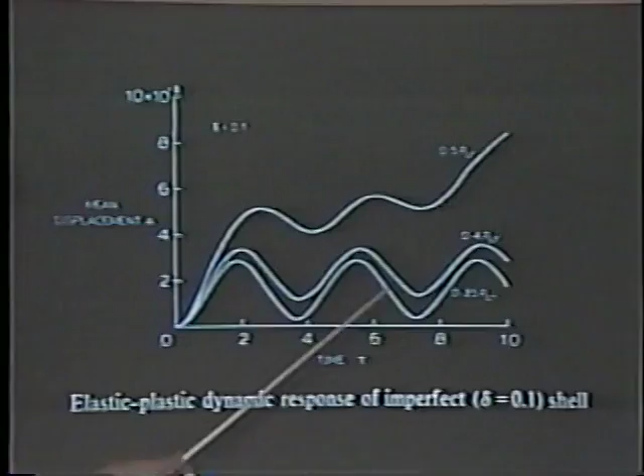On this slide, for a constant imperfection level, we increase the load applied to the shell, and you can see that at 0.4 PCR, the shell is still stable. At 0.5 PCR, the shell is unstable.

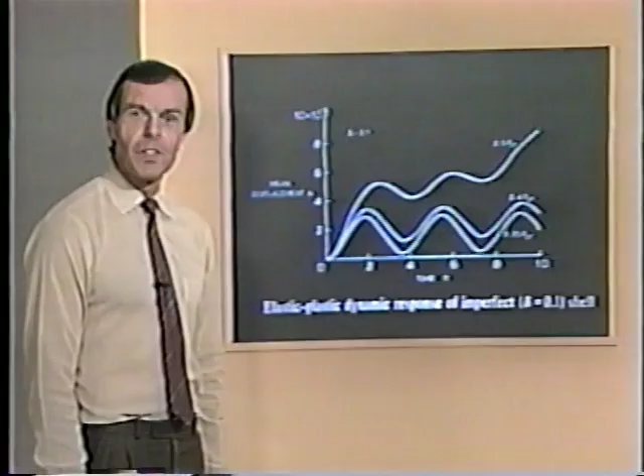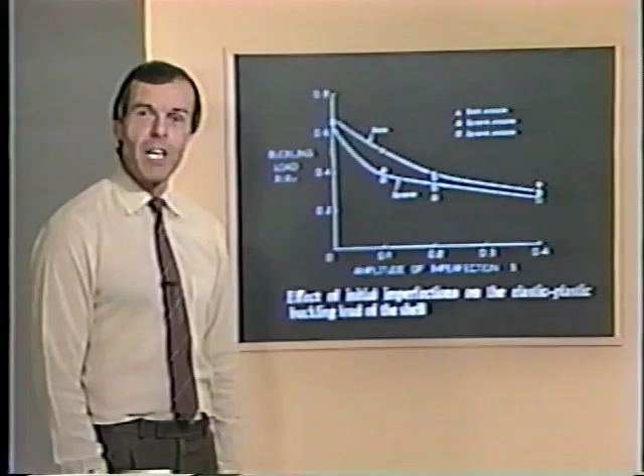Of course, we could not discuss all the details regarding these analyses in this short time. Please refer to the study guide, in which you find a reference to the paper where we have discussed the details of these analyses.